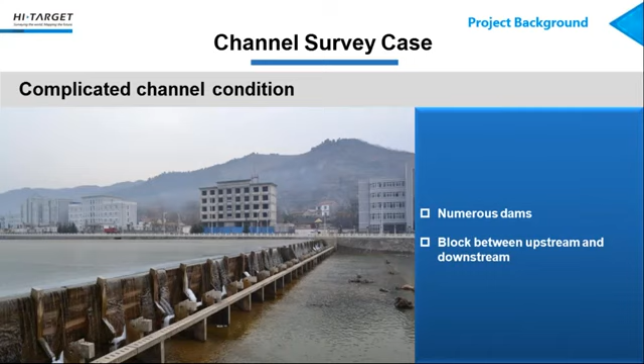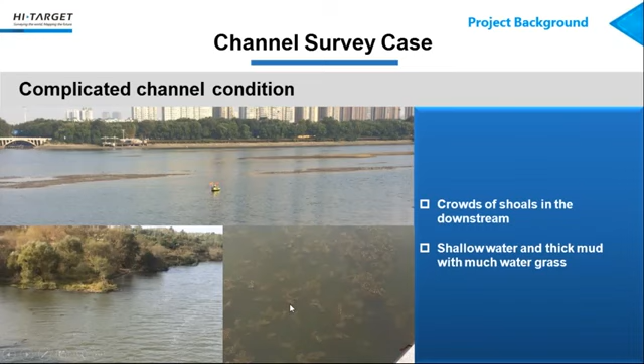And in this picture, there are crowds of shoals downstream. Conventional survey boats could hardly be sailed with deeper draft. And this is iBoat BM1. And in these two pictures, water grass alongside the channel was also a big trouble to propellers.

And this picture is about how the older generation of surveyors executed hydrographic survey. The conventional method with low accuracy and efficiency is even difficult to ensure the absolute safety of surveyors. All these mentioned are big challenges for the Hun River project. Then a campaign called Revolutionary Unmanned Survey Solution is being launched by us.

iBoat can be manually controlled by intelligent controller at a distance of 2 km and automatically pilot according to the plan lines connected with base station at a distance of 5 km. We utilize a wireless bridge base station to achieve data communication between iBoat and land base.

And so the convenience of deployment helps with numerous dams and ensures the continuity of survey. And you can see the flat bottom is convenient for the deployment and placement of iBoat, while with most ported propellers, propellers may need to be disassembled and assembled for transportation. And the ducted propellers, newly developed by Hi-Target, protect propellers from being twined by water grass and can adapt to ultra-shallow survey.

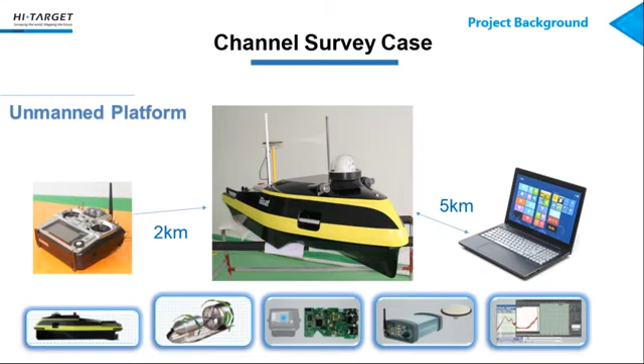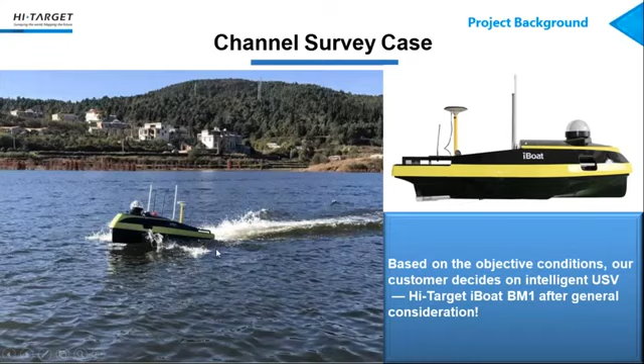Installed with HiMax sounding software, the operating PC is responsible for collecting, guiding, and post-processing. Analog depths and digital depths are combined for conveniently judging channel water depths. Based on the objective advantages above, our customer decided on intelligent USV Hi-Target iBoat BM1 after general consideration. Yeah, this is a picture when it's working.

Accomplish the whole procedures. In the preparation period, quick transportation by cars and easy deployment by 3 to 4 people provide much convenience for saving time. Then it comes to the establishment of a shore workstation, including the wireless bridge and specific PC installed with relevant software.

And you can either import a plan line document or design the plan line directly in our software. And in the implementation period, the switch over between automatic mode and manual. In the automatic mode, the iBoat BM1 can autopilot as the designed route. In manual mode, we can manually sound feature points.

In the post-processing mode, we need to process the data and generate related data contents and formats. And the document would be imported to AutoCAD software to generate underwater contours with relevant coordinates.

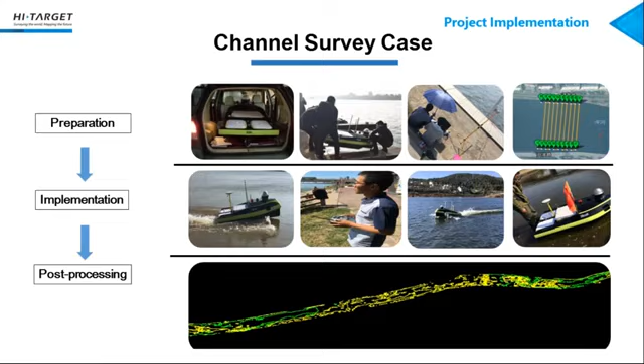And right now, let's see some typical operations of iBoat BM1. And you can see clearly from the picture. The portable size of iBoat BM1 is convenient to be transported to the survey zone and is easy for deployment.

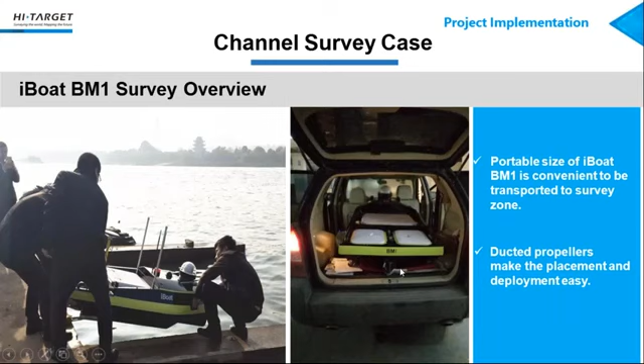Are parallel with the bottom of iBoat. And this is ultra shallow survey operation of iBoat BM1 with 20 centimeter draft. There's no pressure for iBoat BM1 to work on shoals. And the ducted propellers are protected from being twined by water plants and plastic rubbish.

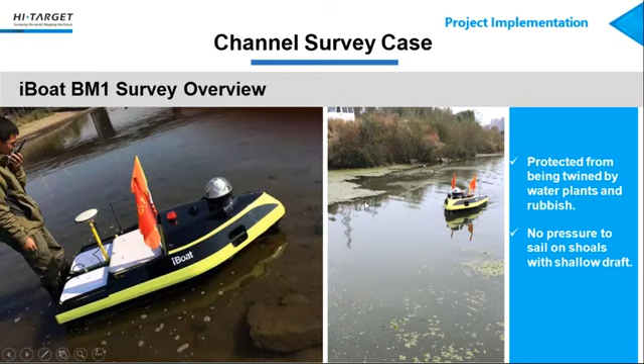And you can see this big wide antenna is responsible for the data communication between iBoat and the PC station, reaching the distance of 5 kilometers. Only one staff actually is needed for the operation of PC station. In flexible switch over between manual and automatic mode can be done.

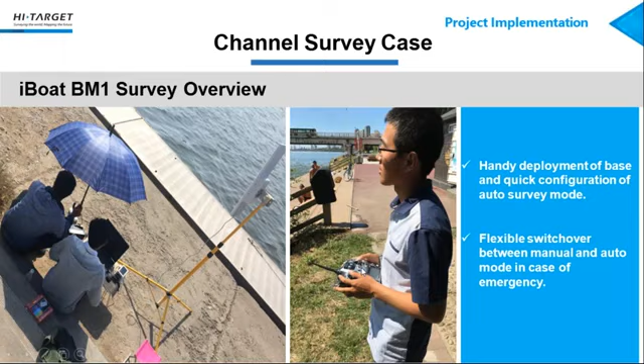Different plan lines can be designed at your demand and imported as well. And in this picture, we just several plan lines across Hun River. iBoat BM1 would autopilot as designed route, while real-time data of position, sounding, and boat status would be transmitted. You can also open high-definition 360-degree camera to monitor surrounding environment.

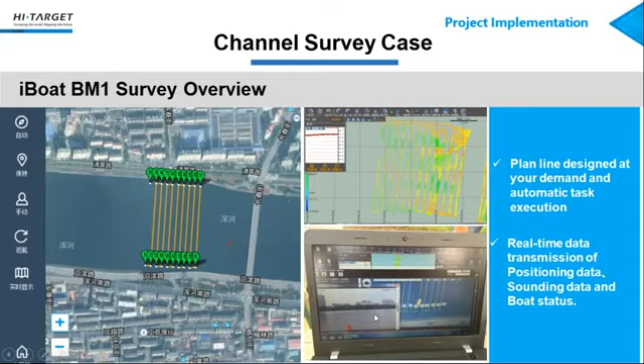Assistant propellers are swift to help iBoat survey in specific terrains like shores by intelligent controller manually. And once the battery is too low to execute anymore, or there is a signal drop, the iBoat BM1 would auto-return to the home point automatically, which ensures the corresponding safety of iBoat.

The ultrasonic obstacle avoidance system ensures the safety for iBoat BM1 further. And you can see the 360-degree camera. All this to the success of Hun River project.

Last but not least, data processing should be seriously treated after all data was collected. We had to correct false depth points by analog signal and manually sample feature points to get reliable proof. In sampling module, the blue line is the digital depth, and the red line is the analog depth, which means echo wave. We had to check the blue line value according to analog depth to get true depth.

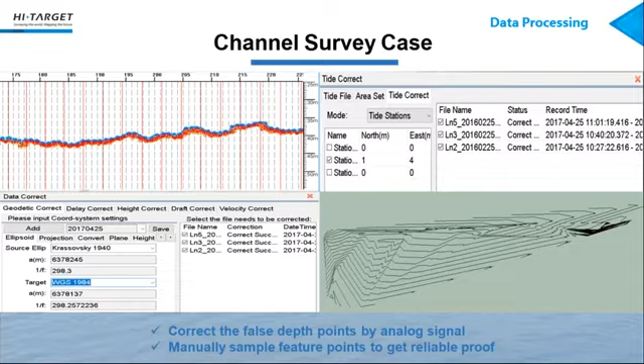As mentioned before, next I will illustrate the future prospects of USV solution, including the powerful weapons equipped on iBoat BM1 to accelerate the unmanned revolution, and further application of USV solution. Until now, there are two types for the series of iBoat, which are all researched and developed by Hi-Target. All in one means one brand covers all core technology.

I believe you're familiar with iBoat BM1, so what's the core advantage of iBoat BS1? With 10 cm draft and 4.5 meter per second top speed, iBoat BS1 can work at more shallow water and quicker speed. Only 2 people are needed for the deployment of it, and the trunk of small car is big enough for the transportation of it. However, right now, let's concentrate on iBoat BM1, and detailed information about iBoat BS1 can be learned by telling us through email.

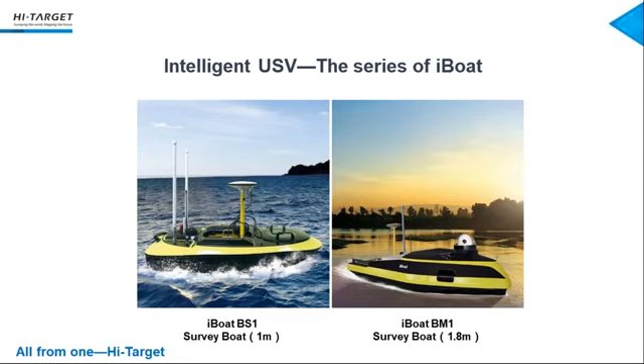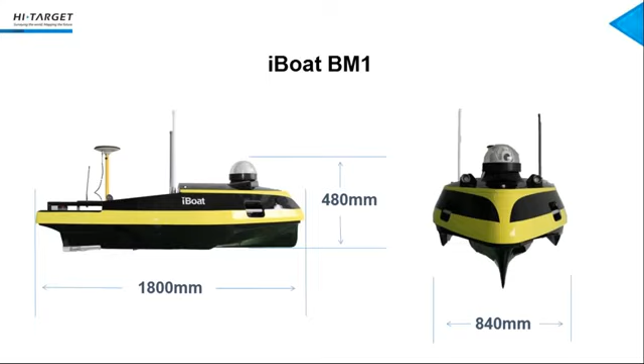These are the dimensions of iBoat BM1. 180 cm long, 84 wide, 48 cm high. Installed with single beam echo sounder, acoustic Doppler current profiler, side scan sonar, and multi-beam echo sounder in the future, iBoat BM1 is widely applied in underwater landscape surveying, hydrographic surveying, underwater topographic surveying, and water quality monitoring.

Ducted propellers, differential antenna, GNSS position antenna, wireless communicating antenna connected with the base station, high-definition camera, ultrasonic obstacle avoidance. You can see individual module of each part is designed to integrate the whole system. So how do the powerful weapons equipped on iBoat BM1 accelerate the unmanned revolution on Earth?

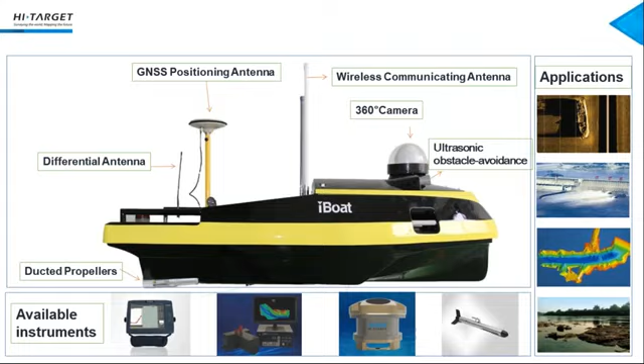Trimaran design is resistant to level five wind and level three waves, which ensures the stable sailing of iBoat BM1. Swift hull, and 20 cm draft provide capability for ultra-shallow operation, reaching top speed of 3.5 meters per second. Kevlar and carbon fiber composite made body is of high strength. 30 kg payload makes it possible to install multiple instruments.

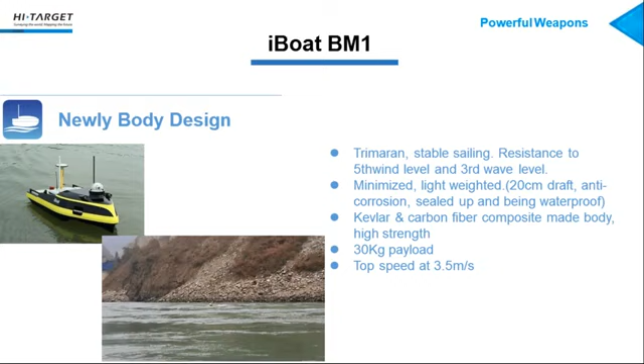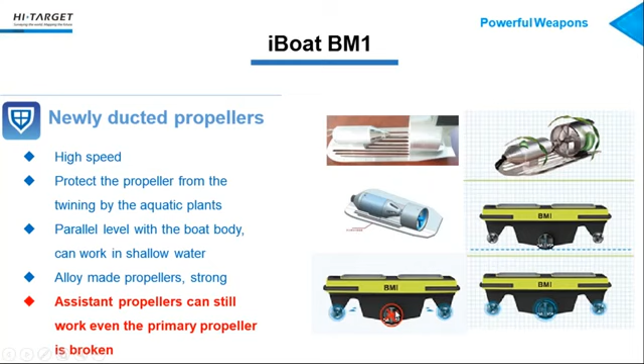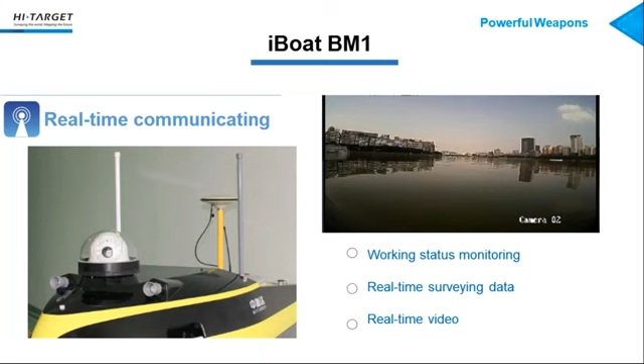Long distance and stable communication in real time ensure the survey data and high definition video can be communicated to satisfy survey demand. The power used for iBoat BM1 is absolutely clean, Li-ion battery with high capacity, 6-hour endurance, which can be doubled to 12 hours optionally.

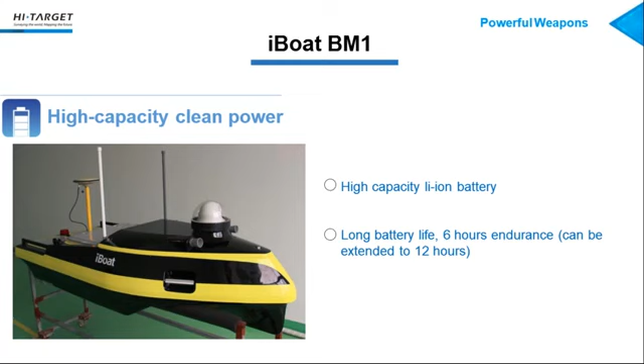With predefined lines, iBoat BM1 can autopilot like the picture. All you need to do is just let it swim as it wants to. And by assistant propellers, the direction can be accurately controlled to sail as the designed route.

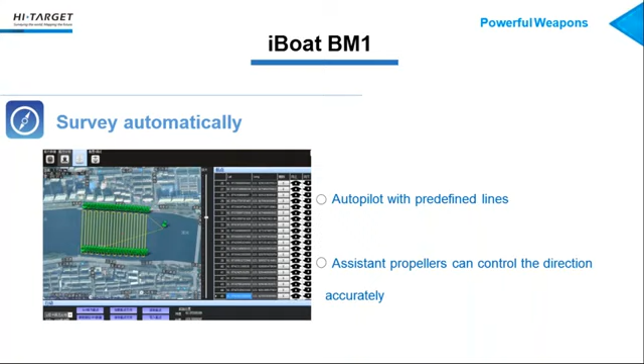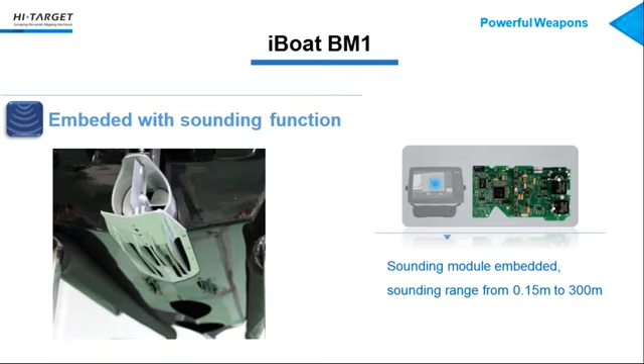And as mentioned before, a professional sounding module is applied in the echo sounder, measuring the depth from 0.15 meter to 300 meters accurately. And for safety, ultrasonic detection and an obstacle avoidance system help iBoat BM1 achieve corresponding safety.

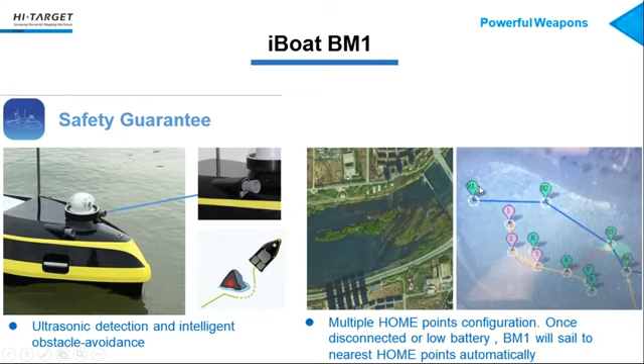And we can configure multiple home points. Once disconnected or low battery, iBoat BM1 will sail to the nearest home point automatically. For example, if there is no signal at point 1, it will go to the nearest, for example, this. And for example, if there is another point in this place, it will sail to home point 1. So it's intelligent.

We can split the screen to an external screen, one for sounding and another for guiding. And a general laptop can be used as the workstation after being installed with the relevant software. All these powerful weapons equip iBoat BM1 with the capability to accelerate the revolution of unmanned survey solutions.

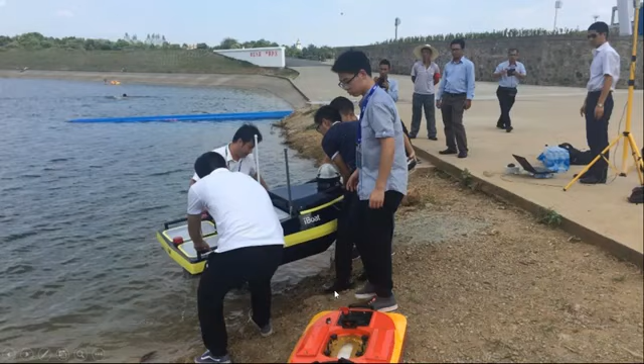And these are demo pictures of iBoat BM1. And you can see very shallow water and easy deployment. This is very easy deployment for 4 people. And one-man operation for the PC station is enough. Survey and unmanned. And at last, the beautiful sights.

And until now, more than 20 roadshows have been held all over China, in major provincial capitals. More and more customers join in the multiple applications. I believe all of you will be in favor of our products as well.

Also, not limited to channel survey, further application of USV will be achieved by the Hi-Target iBoat series. For marine survey, the type of survey could be harbor, dock, bay, offshore survey, underwater topographic survey, dredging, monitoring, emergency survey.

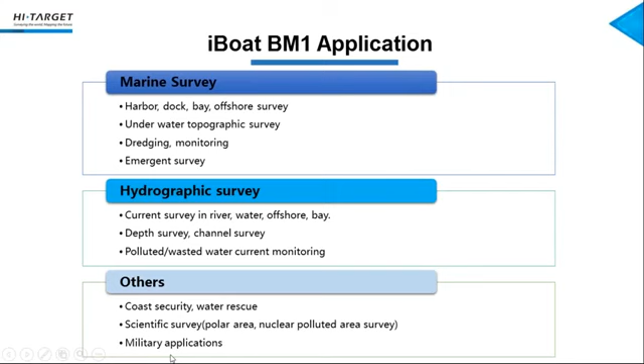And for hydrographic survey, the aspect could be current survey in river, water, bay, channel survey, depth survey, polluted water monitoring, and for others, there is bound to be a rise in application of coastal, scientific survey, and military applications. And that's all. So, any questions?